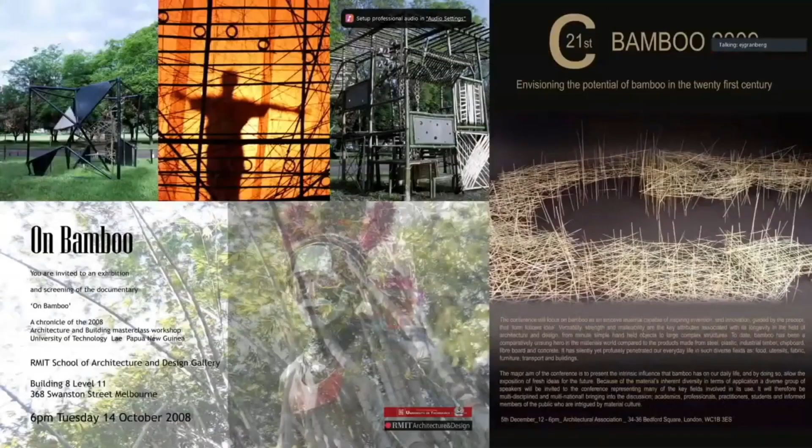Thanks for the invitation. It was really an exploration in the materials that could do things I want to do with my students, which was building big structures quickly. I've done this in other materials in other places, but bamboo very quickly, the opportunities with bamboo very quickly arose in my mind. We had a conference called On Bamboo in 2008 that, it's hard to measure success, but for my standard it was a huge success. I was pretty sure we were going to do something good with my students.

Two-thirds of them had already built in bamboo. We invited 10 international guests to come and build structures with us on campus. But that it would have an afterlife was another thing. RMIT in Melbourne had an exhibition and produced a film about this, and 1.5 years later the Architectural Association in London had a follow-up conference, which was more than expected of a research outcome.

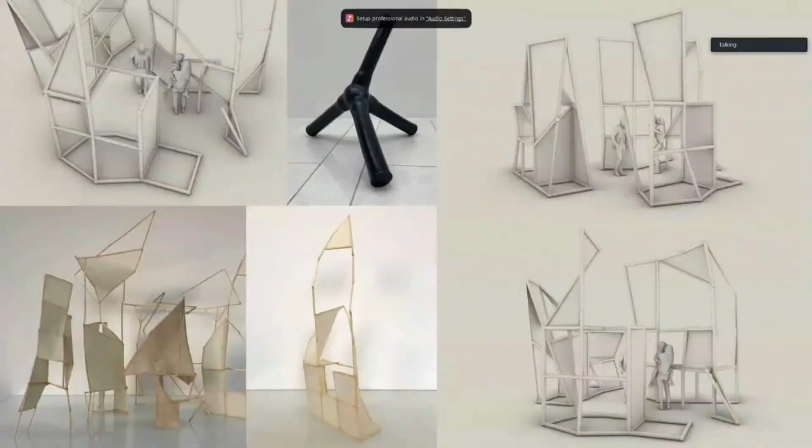And then years passed, and I was working during that time with a joint that uses coconuts and bamboo and fiberglass, and I thought that was a project I'd never see again. But I had it on my shelf, and about 2 months ago, an artist that I know came by my office and said, 'Do you want to sketch on? I have some ideas for sculptures.' So we've done this proposal now, and it might happen.

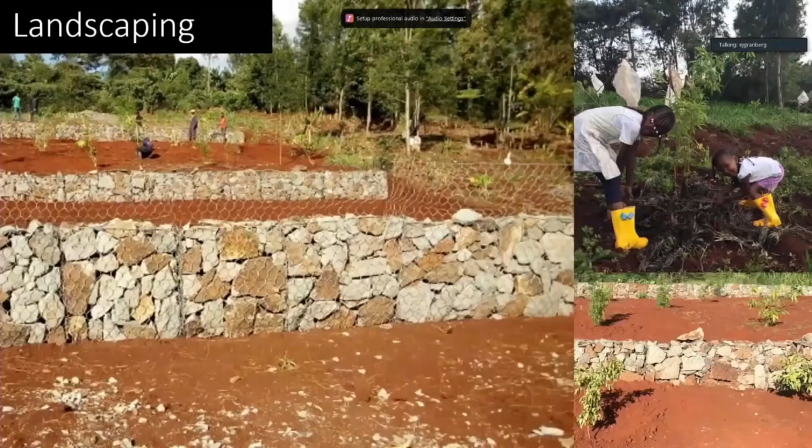Another connection I have with bamboo is my farm, me and my wife's farm down in Kenya, that we have had for 7 years now. The images of the two girls you see on the right side are my nieces, who I think 2 hours after we bought this property were there with my wife and planted the first 6 clumps of bamboo. They are not structurally sound yet, but the bamboo has really grown.

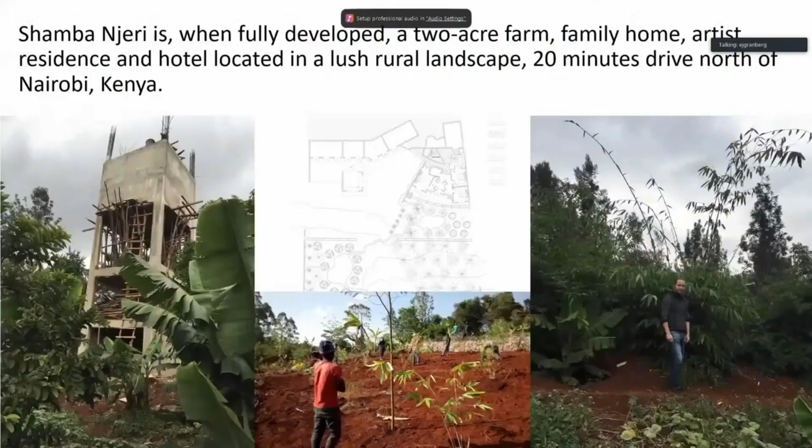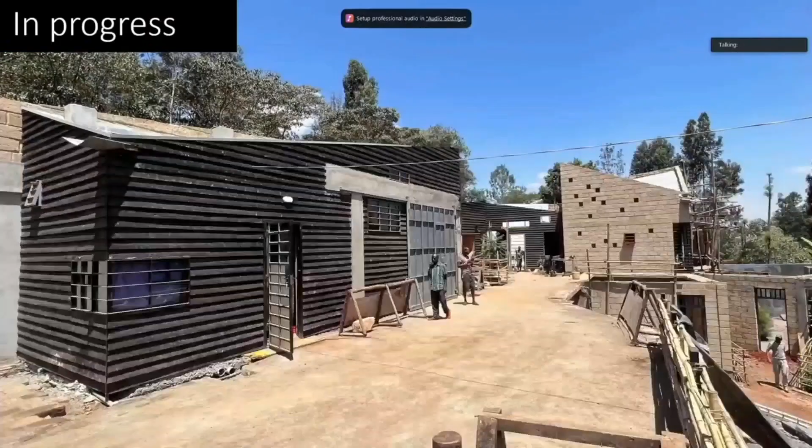And what we have done, which was kind of a bonus, is that it holds the soils extremely well on this slope. Here's some images of the latest progress of this, and hopefully when we're done with this, I see this as a test facility for projects.

And I always do this invitation — I still haven't got any place for you to stay, but I hope to do workshops and happenings here in the future with bamboo-related materials.

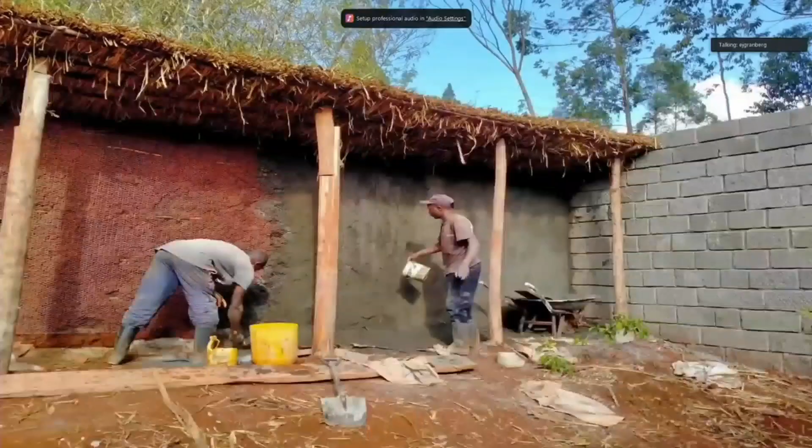We have used bamboo in one structure, although it's not ready yet, and that's a wall which we built in a very traditional Kenyan highland way with bamboo, very similar to rammed earth in the middle of a bamboo structure. This is for our bees.

Kent, who you heard, has helped me with my next project, which is a full feature film about bamboo that just needs a little bit of editing, final touches of editing, sound and imaging, but hopefully it will be released early next year. I've said this so many times, but COVID has really put a hamper on all my timelines.

So my lecture is called Millennia Plus X. Why bamboo now? It feels really odd to say this, but bamboo has been around for a long, long time, and yet it hasn't really fulfilled its promise as an industrial material.

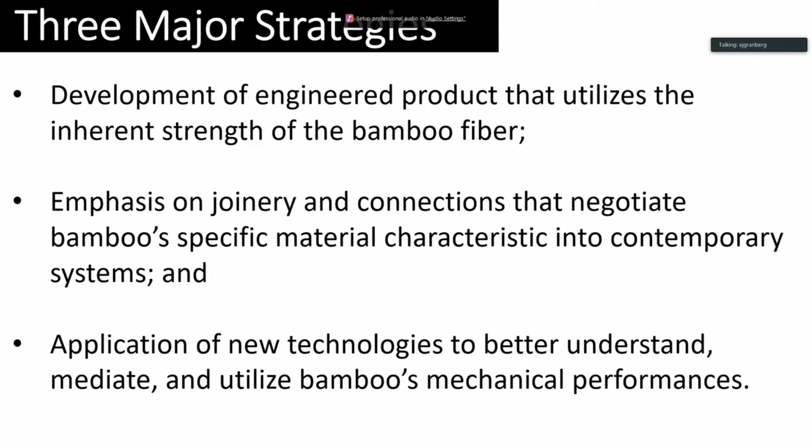I'm going to come back to all three of them, starting with engineering bamboo. I don't really know what audience I have today, so if you think I'm a little bit shallow and quick, I try to give you a palette of what I think and how I think this is going to happen, but also to open up for discussion.

Engineering bamboo is simply—we have done this in wood. We have taken organic materials like wood, cut it to pieces, glued it together for a long time. Now bamboo seems to be, and there's a reason why bamboo is almost more suited for this, because with the directional fiber construction, we can see fiber optimization and stuff like this.

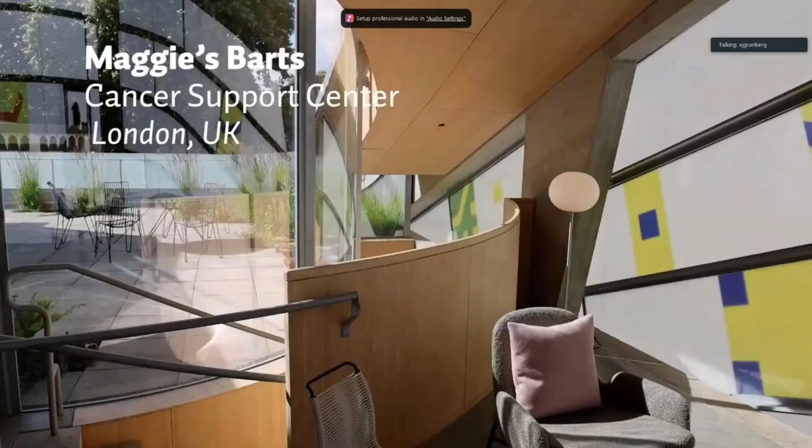But I want to talk a little bit about these oddities, which are in between the organic materials and the industrial material, because I think we're going to see a whole modality here. Here is a little interior in China, stored by a Chinese interior design office called Kun, which uses cut bamboo and puts it together to become shapes.

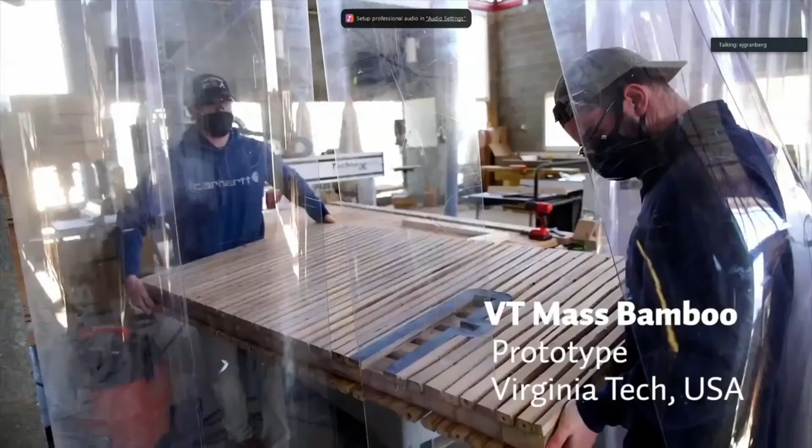Here's also a very interesting research that's ongoing down in Virginia Tech, in the US, where Jonas Hauptman is leading a team to see if we can utilize the bamboo culm in an industrial product. Shows very much promise, I think.

They're coming into the joinery. Here we really have thousands of years of history. What is bamboo joinery, and how can we see them if we start to work with them as designers, engineers, and architects? Well, they enhance the strength of the bamboo.

They mitigate the problems bamboo has in certain load-bearing conditions. For sure, the connection to contemporary materiality means that the tolerances can be mitigated. Accommodation for engineering—it's easier to calculate if you have part of the system in a known form. This comes from levels of local skill. This is a big thing, because to build bamboo today takes a lot of manpower or know-how in manpower, which we don't really have in every country.

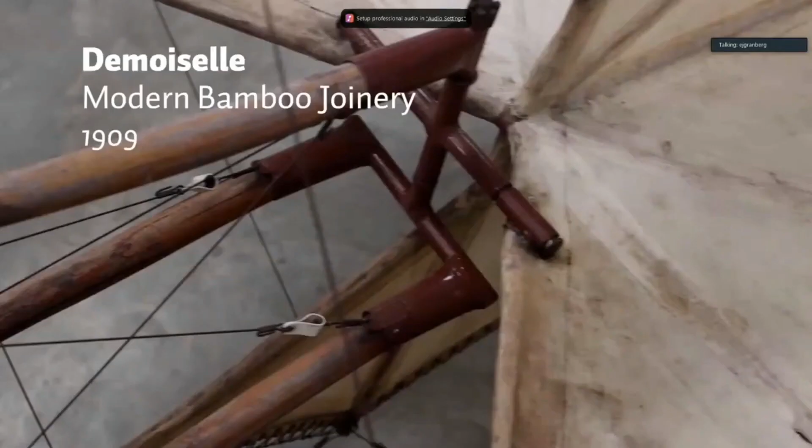Which leads into the minimization of complexity. I think bamboo is going to be harder to build in than most materials—that's not going to change, but we can minimize this complexity. And then the last thing, they need to be affordable and available. I'm going to show you two kind of attempts. One, but before that, this is for a Brazilian.

You should feel pride. This is the Demoiselle Santos Dumont Dragonfly airplane that uses bamboo, in 1909, actually 1908—this is wrong—it was the first one flying. And I went to see a replica built in the Brooklands Museum, and the bamboo joinery—he knew his bamboo. This is a guy that worked with one foot in the Industrial Revolution and one foot in his native Brazilian bamboo-rich childhood. I can talk for hours about this aircraft. It's a beautiful aircraft.

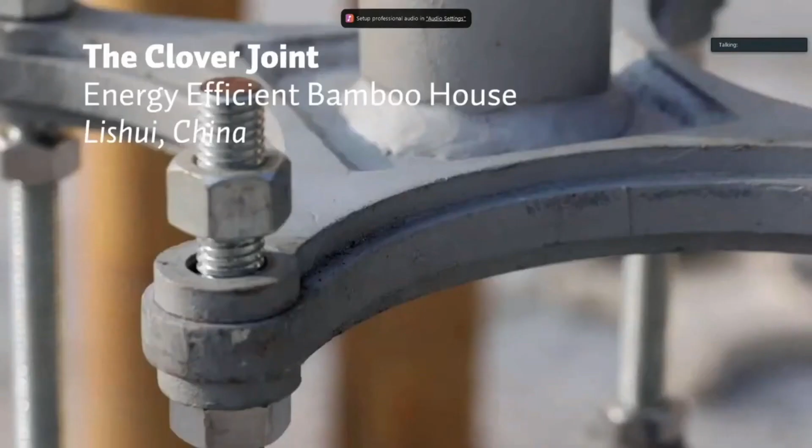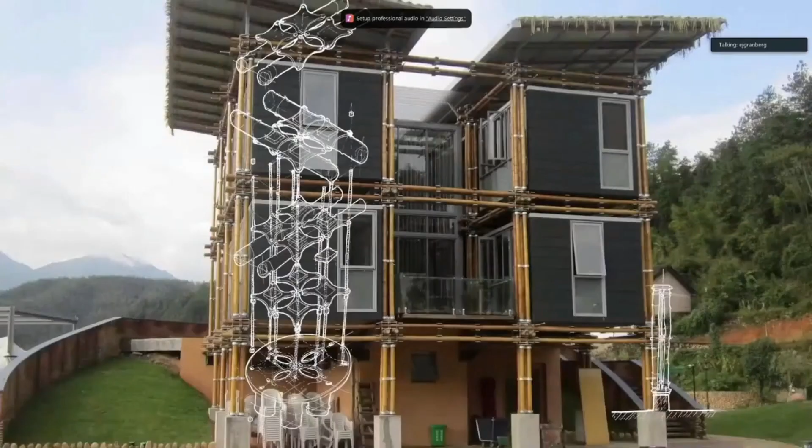Let's go into experiments with joinery that I think is fruitful. This is done by Mauricio Cardenas, who has one leg in Colombia and one leg in Italy. This is his energy house in China at the Biennale. And here you can see the joinery is mitigating a lot of problems to build with materials that, A, disintegrate, B, move a lot, right? So I think it's a very good start.

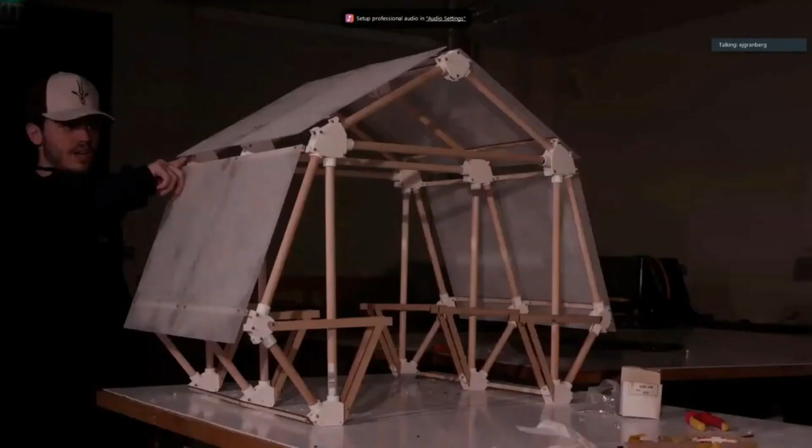I don't think even Mauricio thinks this is a product that's going to change the world, but it's an exhibition project, right? We have done a very similar idea where you can change it in the greenhouse, and I'm going to show this later on. But this is also a joinery where you can change all the joints, and I need to speed this up, I see.

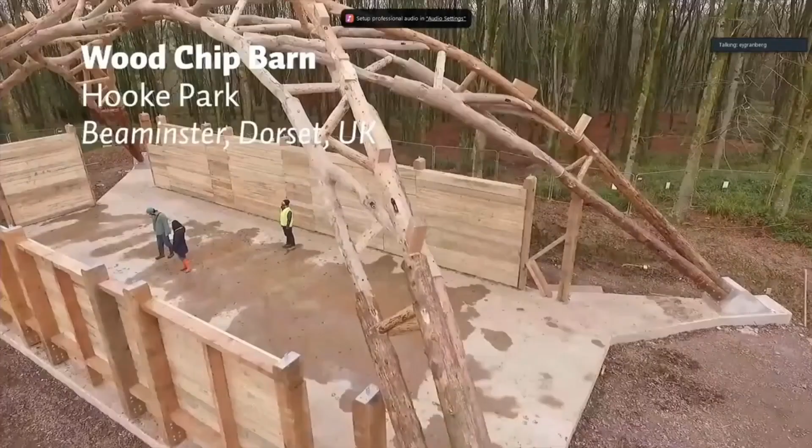Computation - how would that change? Well, first of all, we can now scan materials and put them into their build shapes. This isn't the bamboo project, but it's similar, like this project for the AA in the wood chip barn.

This isn't a new idea - we've done this before. Crooked trees were so valuable that you can find instances where we used crooked trees for our shipbuilding industry. I showed this project, which is Brian Erickson's furniture from Costa Rica, where he bends bamboo. So this is probably one of the avenues - we can see if we can grow bamboo into the shapes we want.

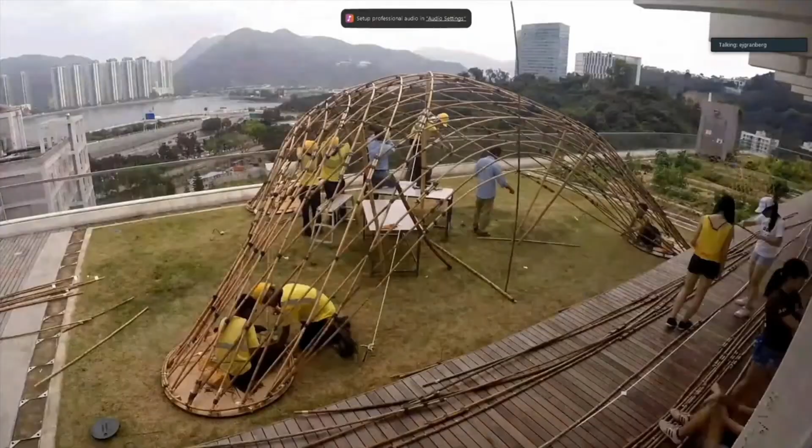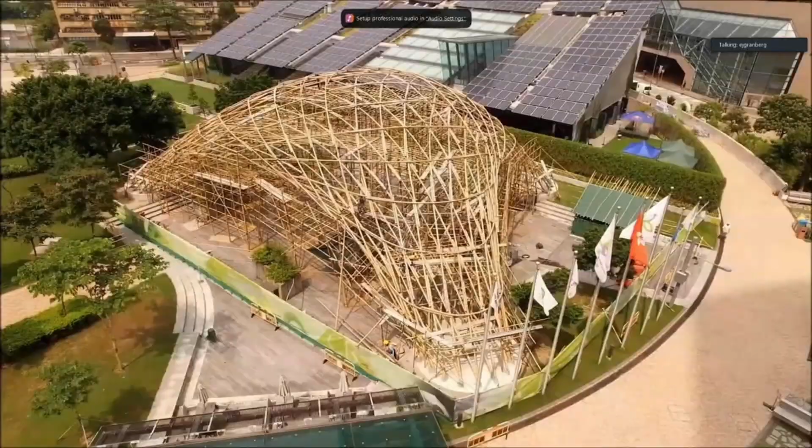But what I think is also on the rise is this idea of, instead of looking at bamboo as individual members, looking at it as a system, and mitigating the shortcomings of things. We don't understand what every part in the system does, but we know how the system operates. Because we now have fairly powerful machines that can do this, we can predict within a range where our building is going to be heading.

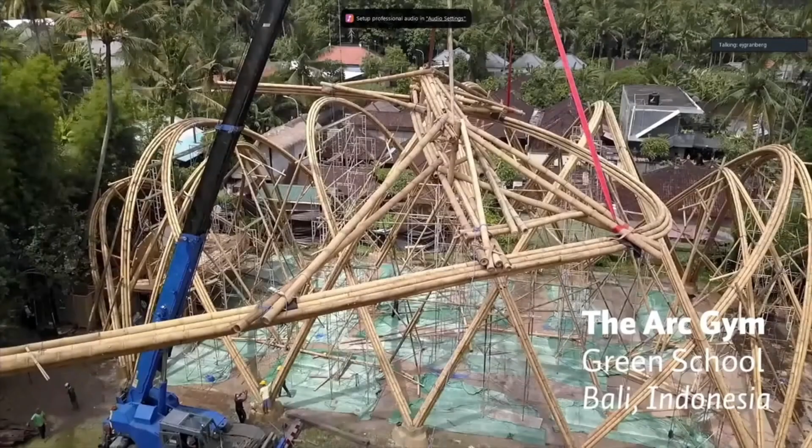And of course everybody knows this building, which is kind of the poster boy right now from the Green School. I've had a lot of talks with Neil Thomas about this building, but here you can see how these kind of double-curved surfaces start to become something.

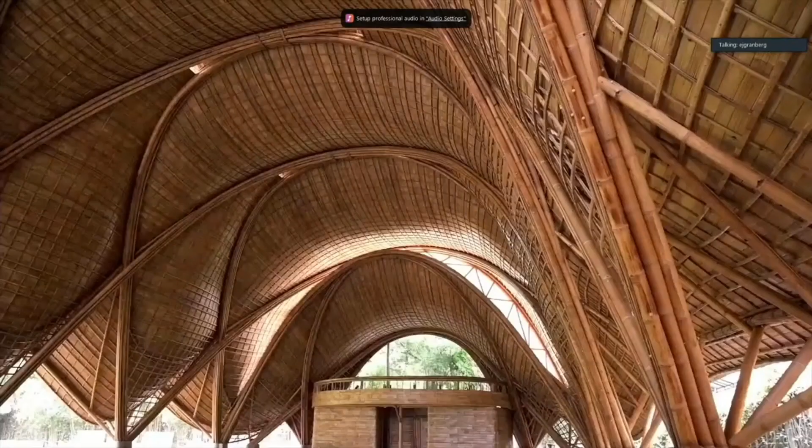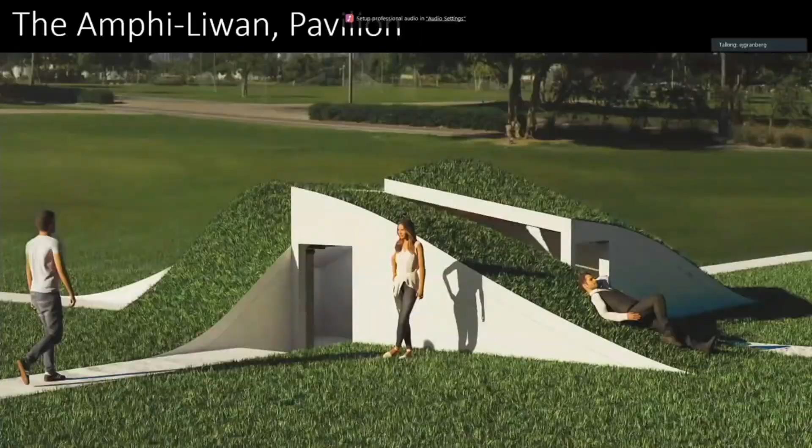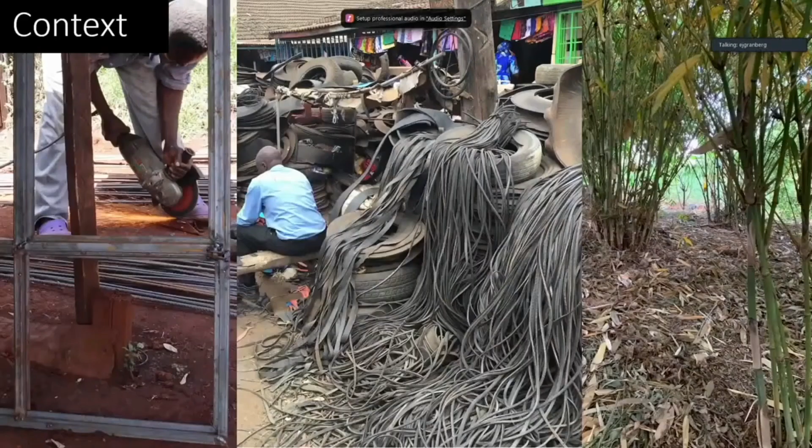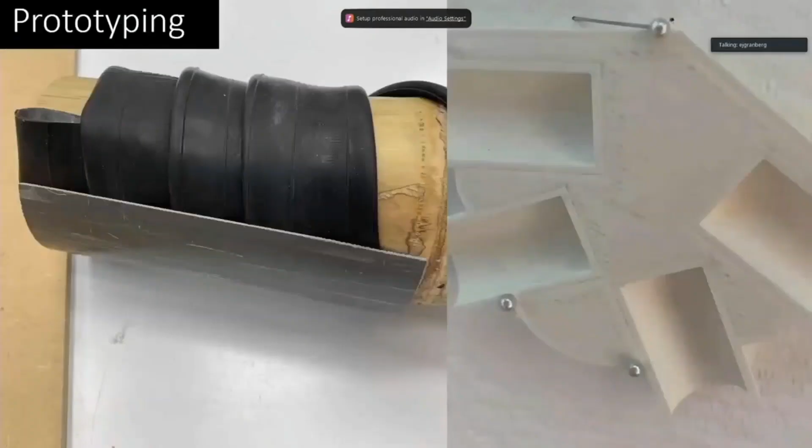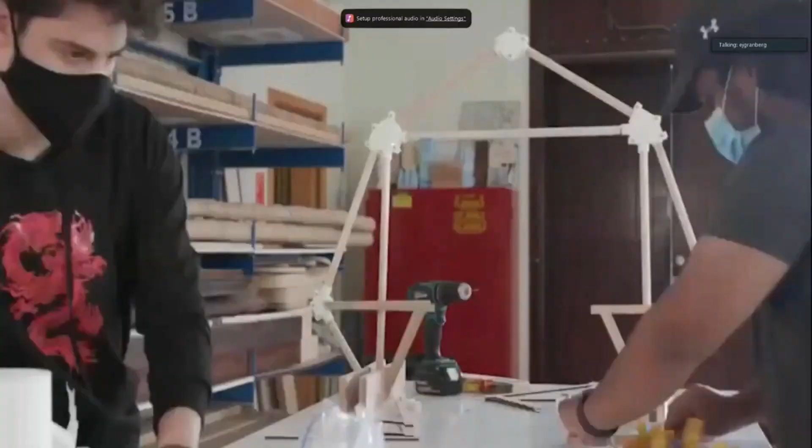Then I talked about the greenhouse, done for a Kenyan context where we have cheap laborers, cheap metalwork, a second-hand market for rubber, and bamboo of quality. The whole idea was to make a greenhouse where every member could be changed when they start to fade away, since a greenhouse is a very challenging milieu for bamboo. We did an experiment here.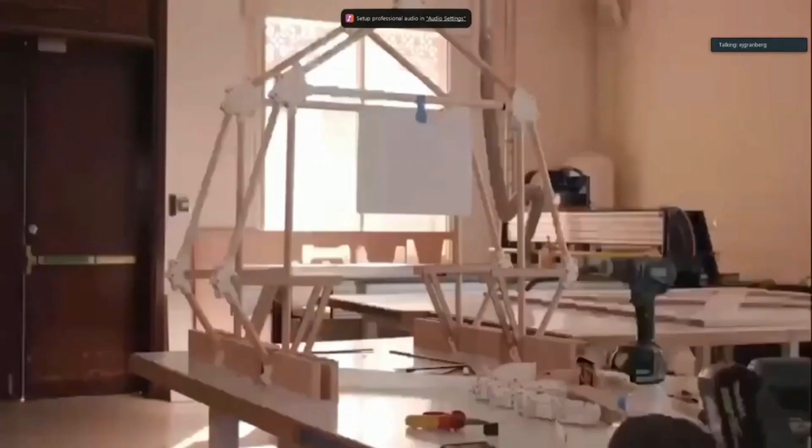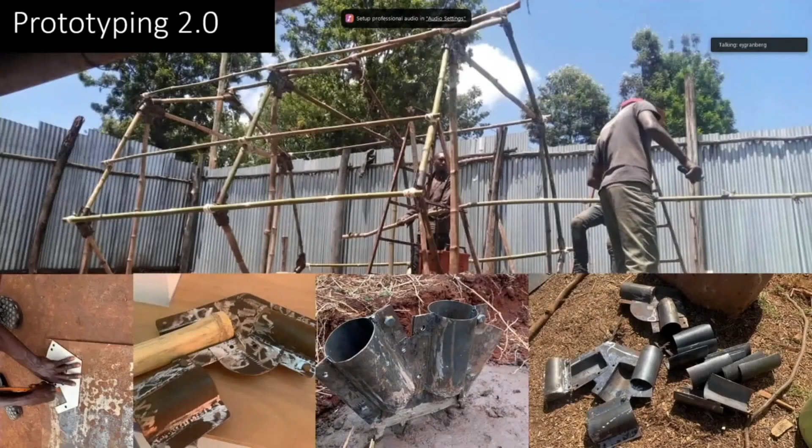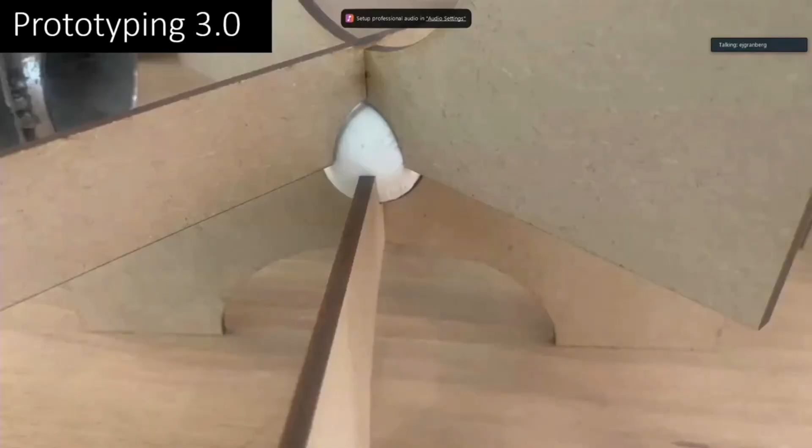We were still in COVID, I couldn't go down to Kenya yet, and then we took this down to Kenya with the precision of computing, and built a first prototype structure that has now been there for 1.5 years. Now we're working with other kinds of connections to this system.

That's really it, so sorry for dragging over time - I thought I was precisely on time here. Thank you so much, it was an amazing presentation, we enjoyed it a lot. Is there any questions?

I have one question myself - can I ask, you are living in Qatar, and anyone likes to go to Qatar, as Professor Omar also said. But do you think there are opportunities also in Qatar? Because in Brazil we have a lot of bamboo availability, as we see in the data. Is there any opportunity for a connection between Brazil and Qatar?

I think it would be - the project I didn't show was really the project where I tried to. So, believe it or not, Qatar was a bamboo country. Up to maybe 30 years ago, a lot of structures were built in bamboo. It's one of the few countries that doesn't have bamboo but has a bamboo construction tradition - one of the materials used for the rammed earth roofs is bamboo.